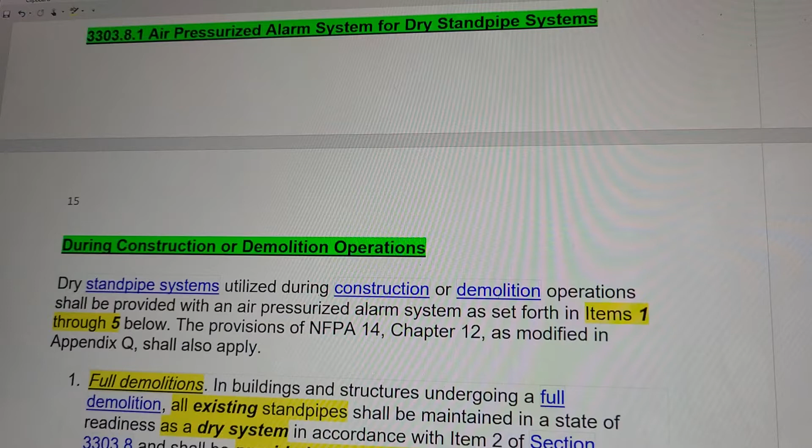I'm reviewing New York City Department of Buildings Building Code 2014, Chapter 33, Safeguards During Construction or Demolition, and I left off in the middle of this section, so I'm going to review this particular section from the top.

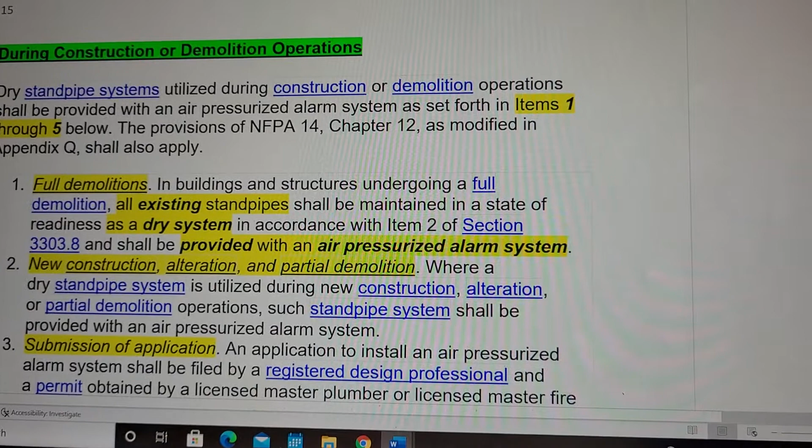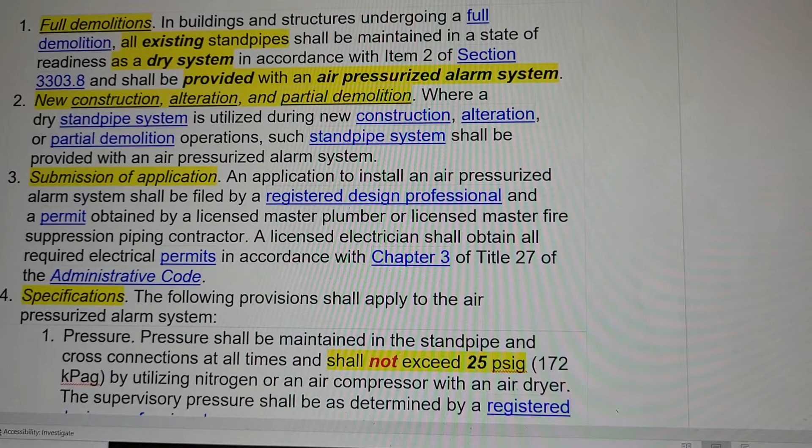3303.8.1, Air Pressurized Alarm System for Dry Standpipe Systems during construction or demolition. So we reviewed these sections. I got Section 1, full demolition, Section 2, new construction, alteration, and partial demolition, Section 3, submission of an application, Section 4, specifications, and then you have the two subsections.

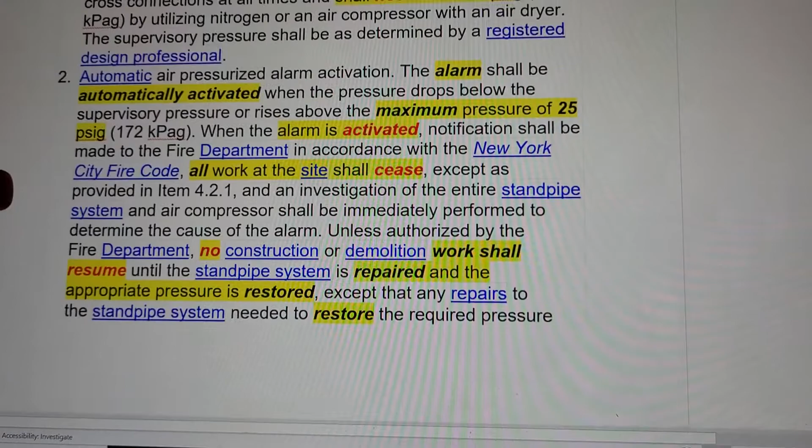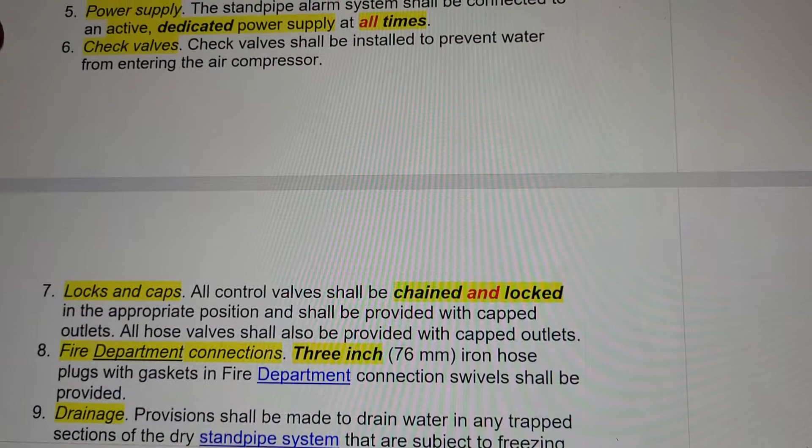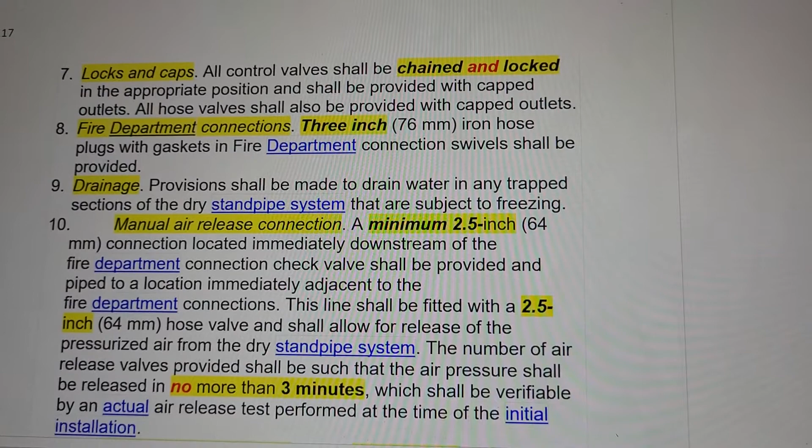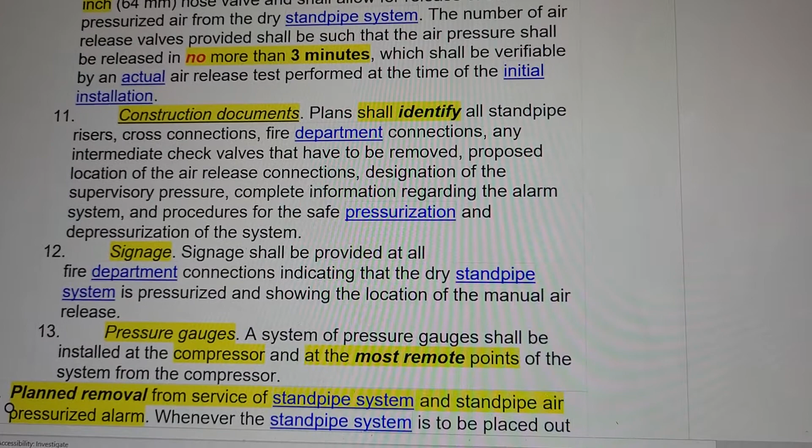Section 3, air compressor, Section 4, alarm, Section 5, power supply, Section 6, check valves, Section 7, locks and caps, Section 8, fire department connections, Section 9, drainage, Section 10, manual air release connection, Section 11, construction documents, Section 12, signage, Section 13, pressure gauges.

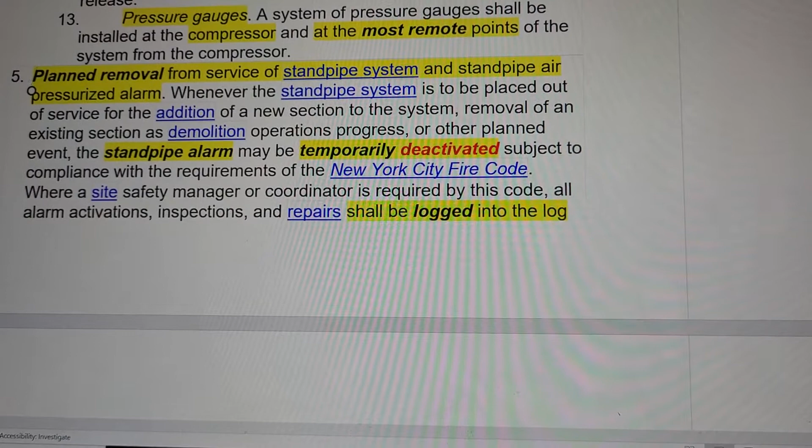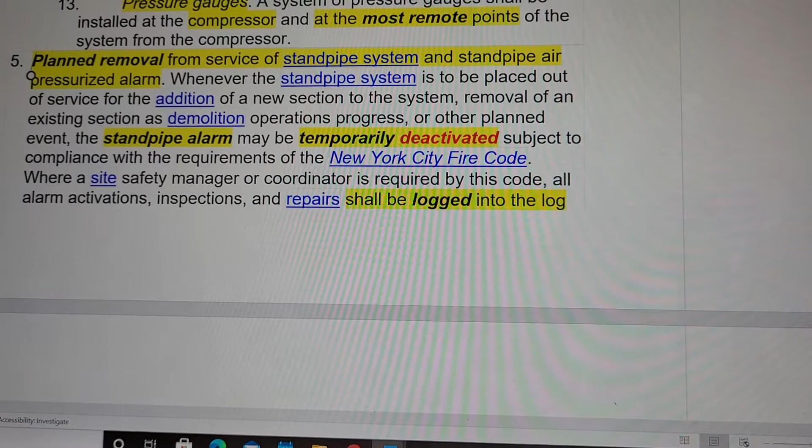And we left off with this Section 5, planned removal from service of standpipe system and standpipe air pressurized alarm. Whenever the standpipe system is to be placed out of service for the addition of a new section to the system, removal of an existing section as demolition operations progress or other planned event, the standpipe alarm may be temporarily deactivated and subject to compliance with New York City Fire Code.

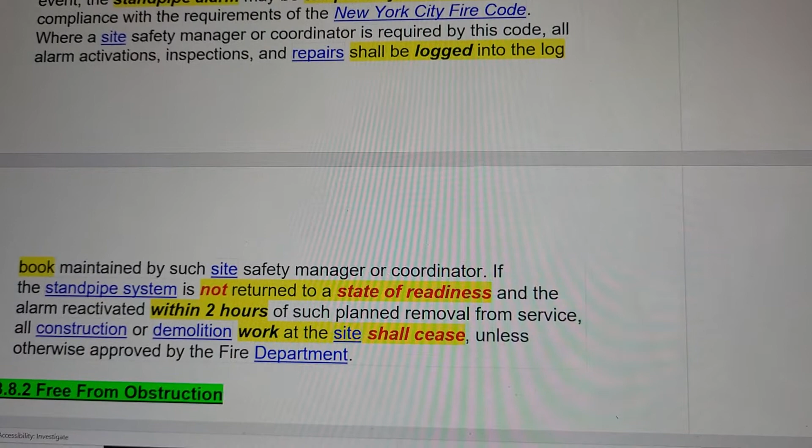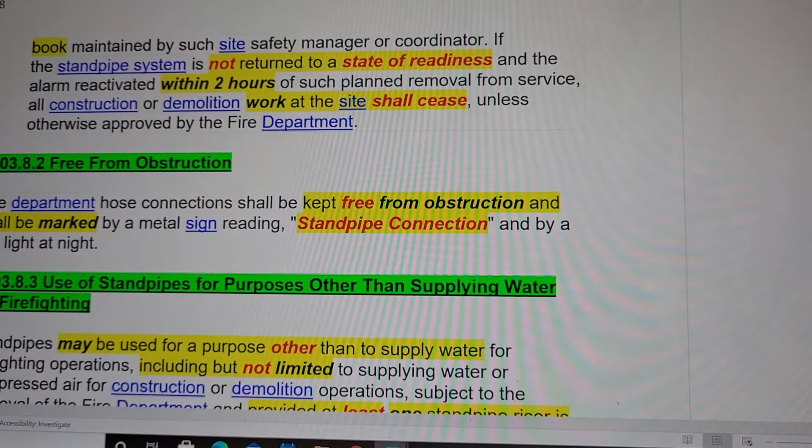Where the site safety manager or coordinator is required by this code, all alarms, activations, inspections, and repairs shall be logged into the log book maintained by such site safety manager or coordinator. If the standpipe is not returned to a state of readiness and the alarm reactivated within 2 hours of such planned removal from service, all construction or demolition work at the site shall cease unless otherwise approved by the fire department.

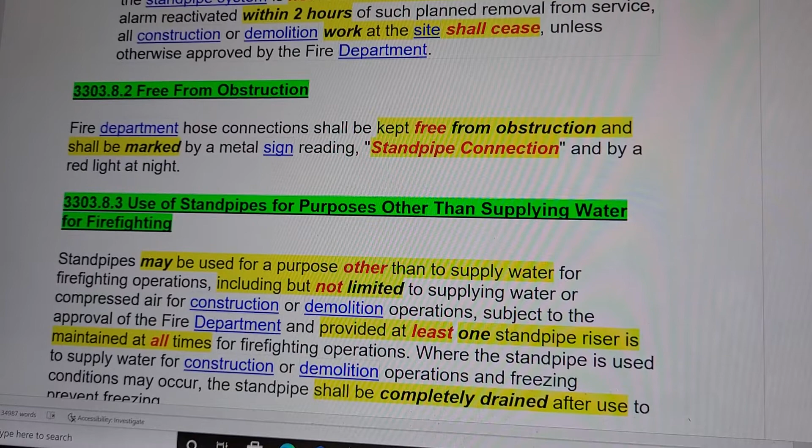Moving on to 3303.8.2, free from obstruction. Fire department hose connections shall be kept free from obstruction and shall be marked by a metal sign reading standpipe connection and by a red light at night. I don't know why I don't have that highlighted.

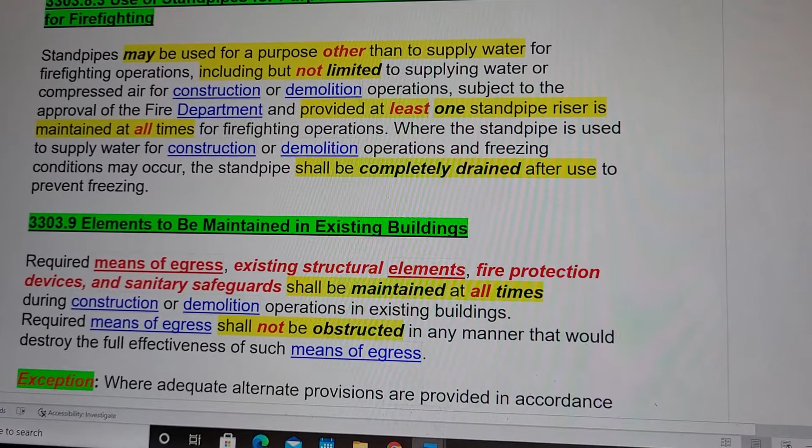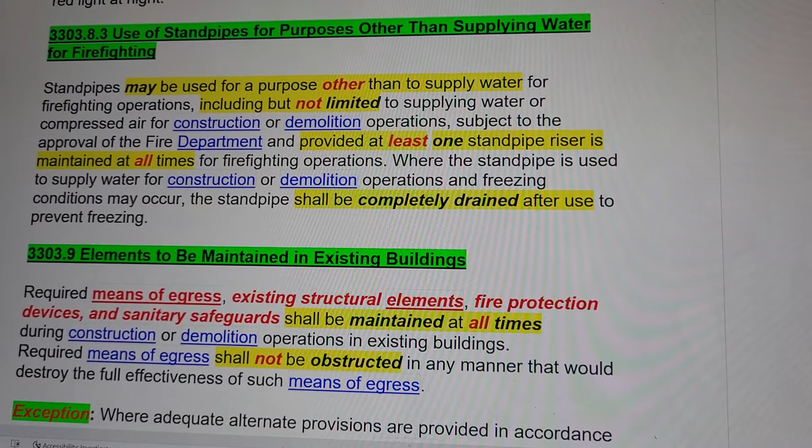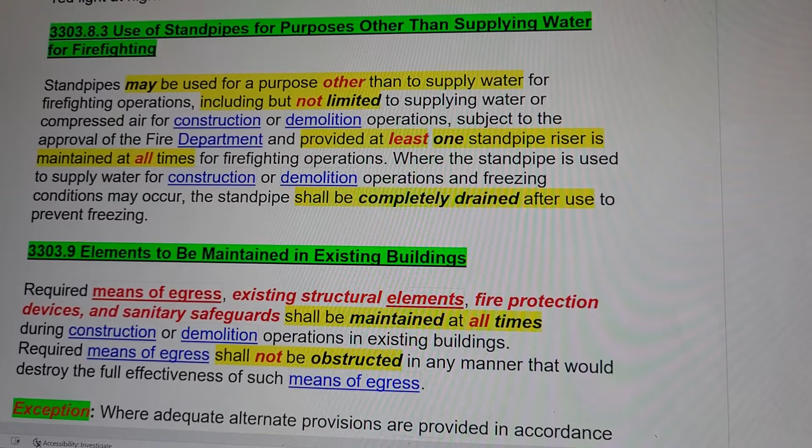3303.8.3, use of standpipes for a purpose other than supplying water for firefighting. Standpipes may be used for a purpose other than to supply water for firefighting operations, including but not limited to supplying water or compressed air for construction or demolition operations, subject to the approval of the fire department and provided at least one standpipe riser is maintained at all times for firefighting operations.

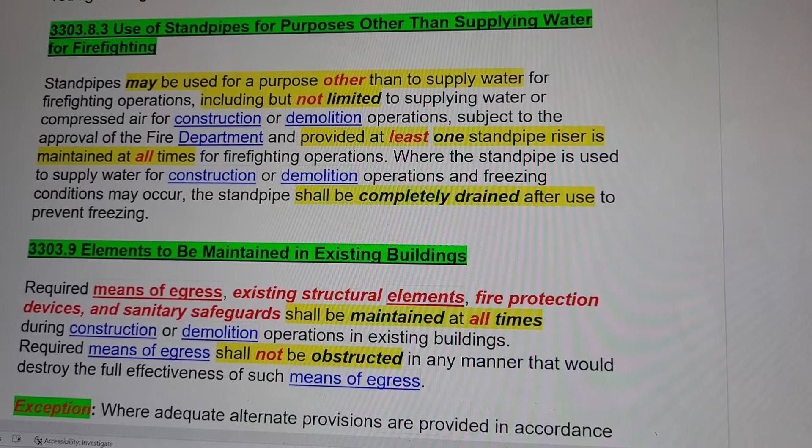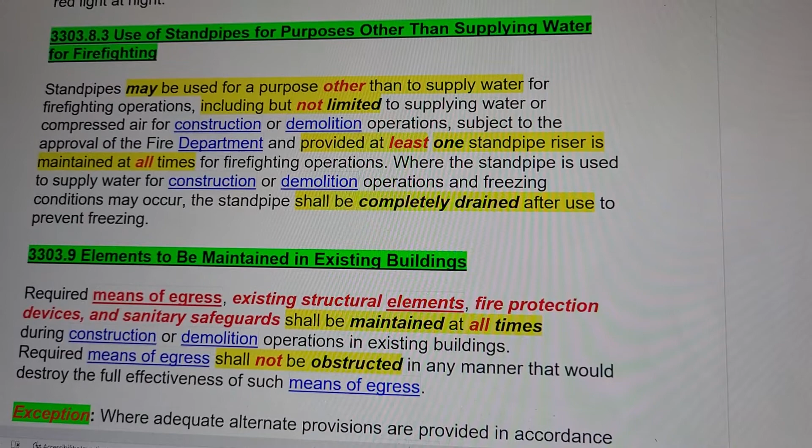Where the standpipe is used to supply water for construction or demolition operations and freezing conditions may occur, the standpipe shall be completely drained after use to prevent freezing.

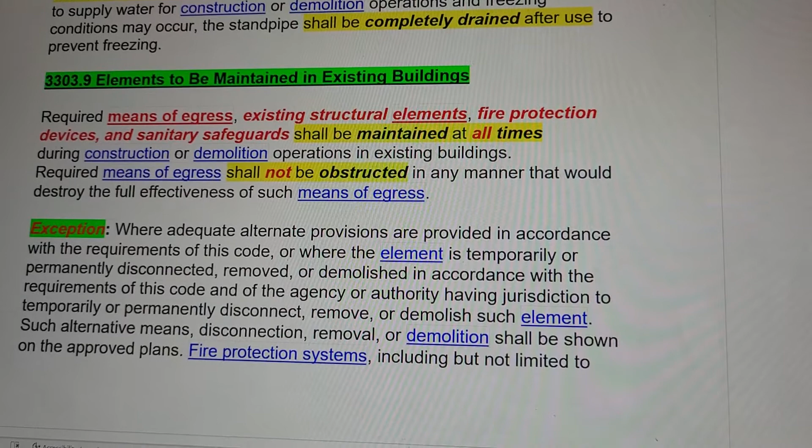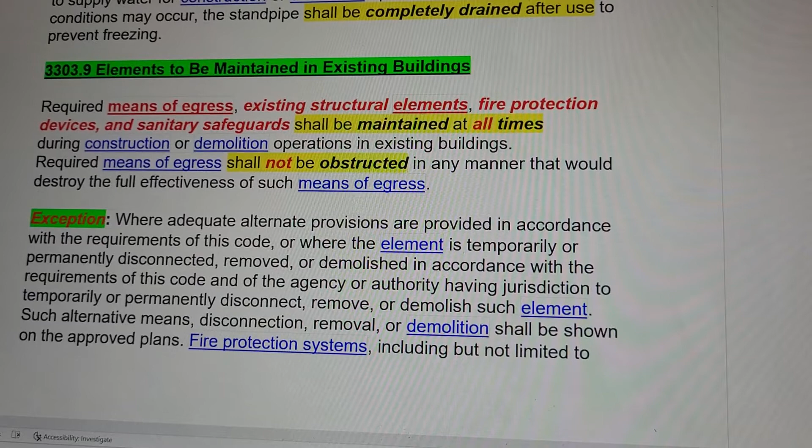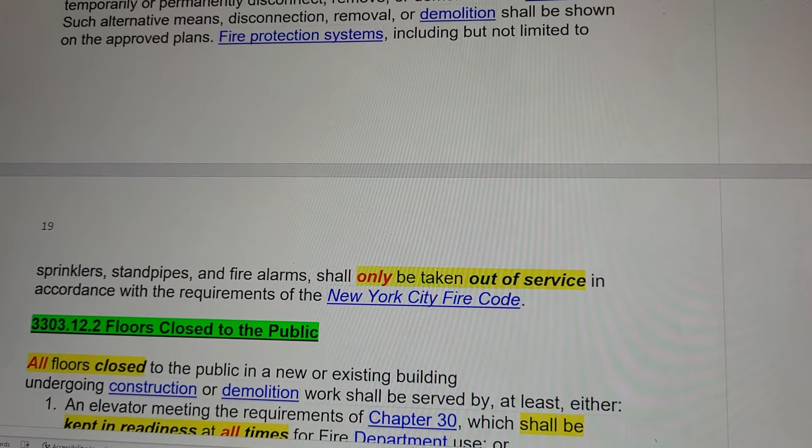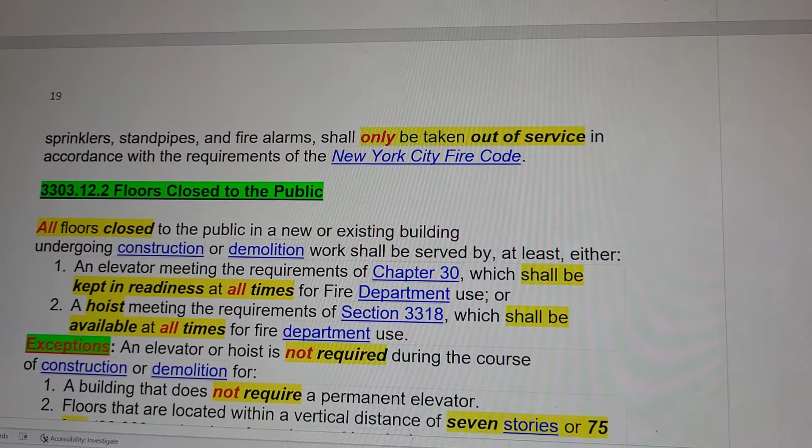Fire protection systems, including but not limited to sprinklers, standpipes, and fire alarms, shall only be taken out of service in accordance with the requirements of New York City Fire Code.

3303.12.2, floors closed to the public. All floors closed to the public in a new or existing building undergoing construction or demo work shall be served by at least either 1, an elevator meeting the requirements of Chapter 30, which shall be kept in readiness at all times for fire department use, or 2, a hoist meeting the requirements of 3318, which shall be available at all times for fire department use.

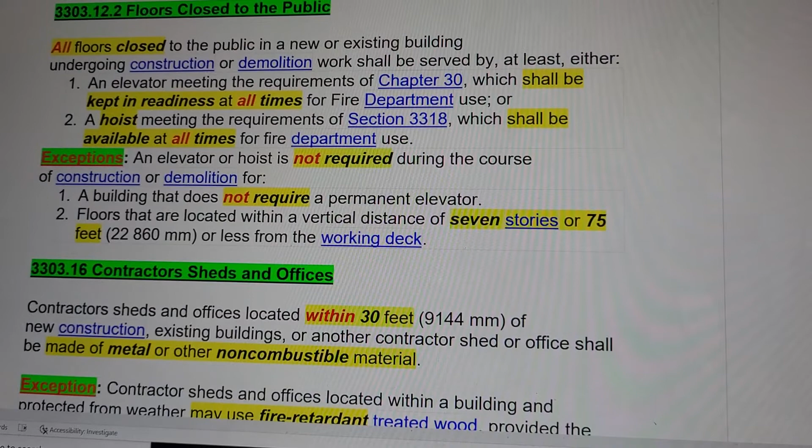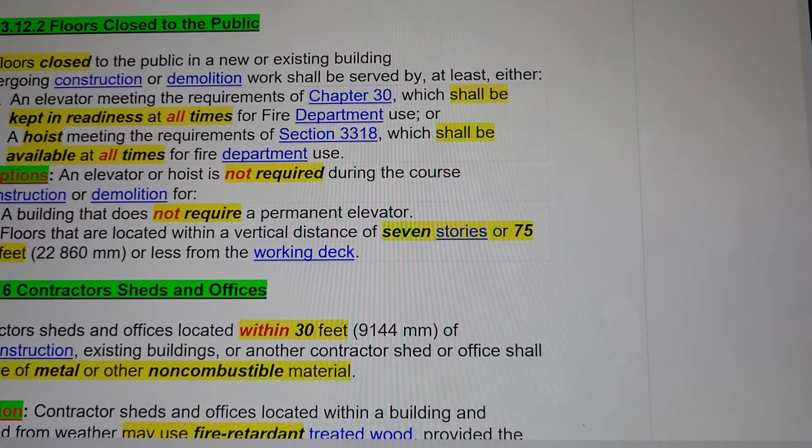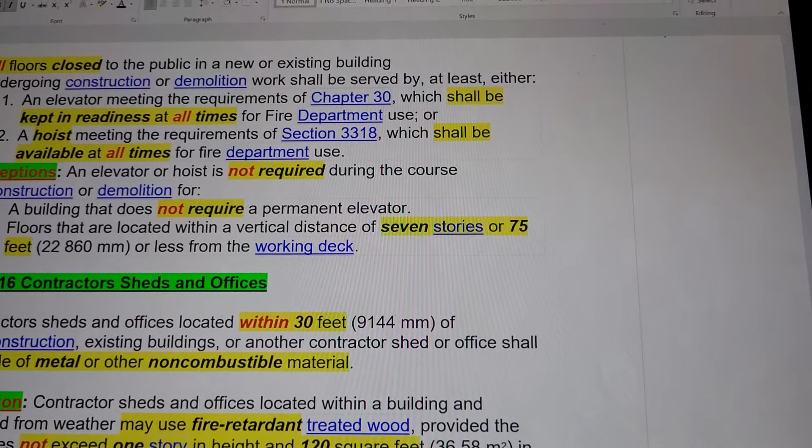An exception, an elevator or hoist is not required during the course of construction or demolition where 1, a building does not require a permanent elevator. 2, floors are located within a vertical distance of 7 stories or 75 feet or less from the working deck.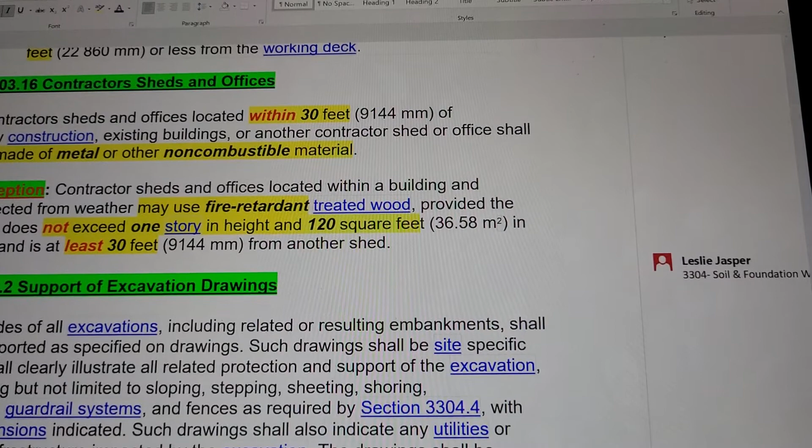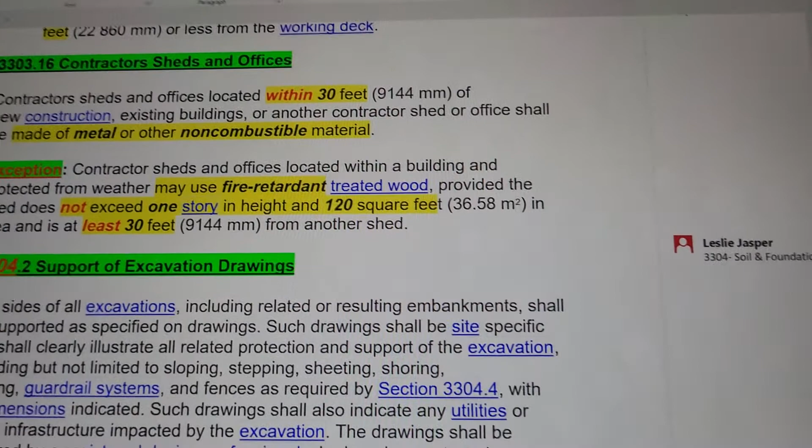Moving on to the last section of 3303, 3303.16, contractor sheds and offices. Contractor sheds and offices located within 30 feet of new construction existing. I just realized this is shifted. Picture retake. Contractor sheds and offices located within 30 feet of new construction, existing buildings or another contractor shed or office shall be made of metal or other non-combustible material.

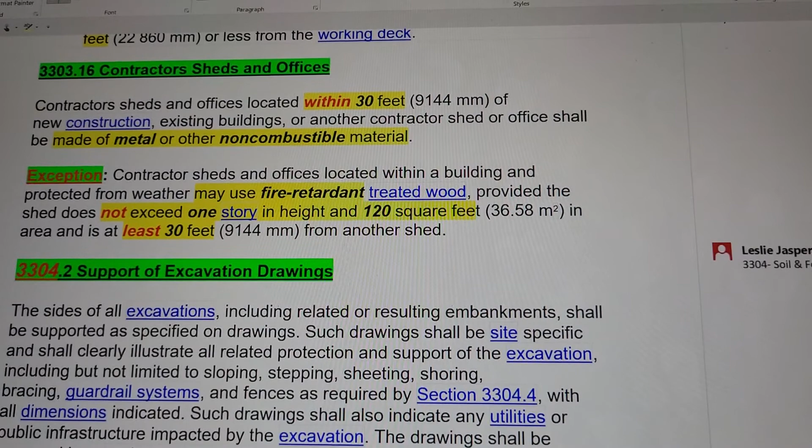Exception. Contractor sheds and offices located within a building and protected from weather may use fire retardant treated wood, provided the shed does not exceed 1 story in height and 120 square feet in area and is at least 30 feet from another shed.

I shall continue with 3304 in the next video. Stay tuned.